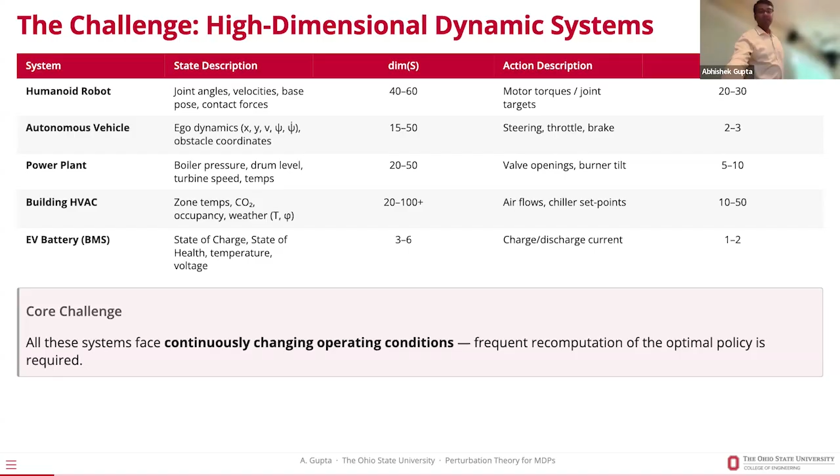So perturbations are ubiquitous, as we all know. There are short-term perturbations, that is what we are talking about. So you could have a situation where you're driving on a mountain, and the slope of the mountain or the traffic on the road is changing in very short durations, within 5 seconds, within 10 seconds, or on a minute basis. You could have a crash where things change very significantly in a matter of a few milliseconds or a few seconds.

You can have medium-term changes. So for instance, if you're driving an ICE vehicle, internal combustion engine vehicle, then your oil and your fluid would degrade over a period of 4 to 5 months, 6 months. Weather changes over a period of months. And then there is certainly long-term degradation which happens over the period of years. And while our group has worked on all these three different types of perturbations, today's talk is mostly about short-term perturbations; we are not going to be talking about medium-term and long-term perturbations in the system.

So this was the problem given to us back in 2017, I think. This was the vehicle testbed. It is sponsored by Delphi Technologies and a bunch of other companies, as well as ARPA-E. And you can see the Ohio State logo as well. So actually this vehicle is Ohio State's property. This had a lot of instrumentation to be able to get information from the roadside unit, get information from the traffic lights, and all of that stuff.

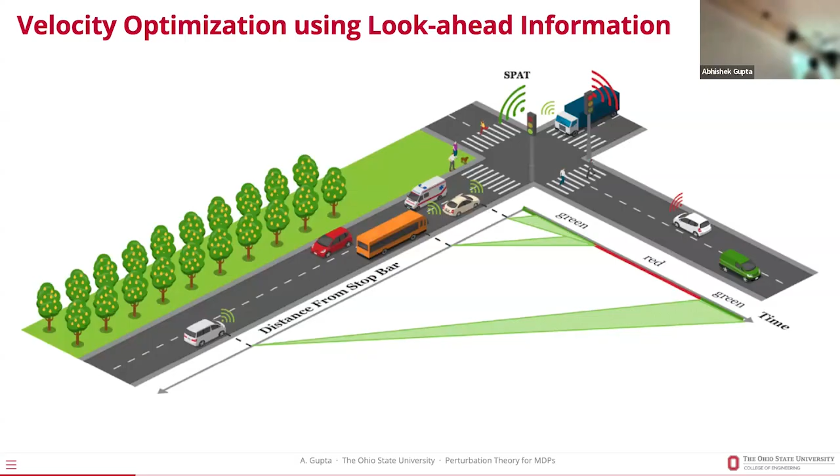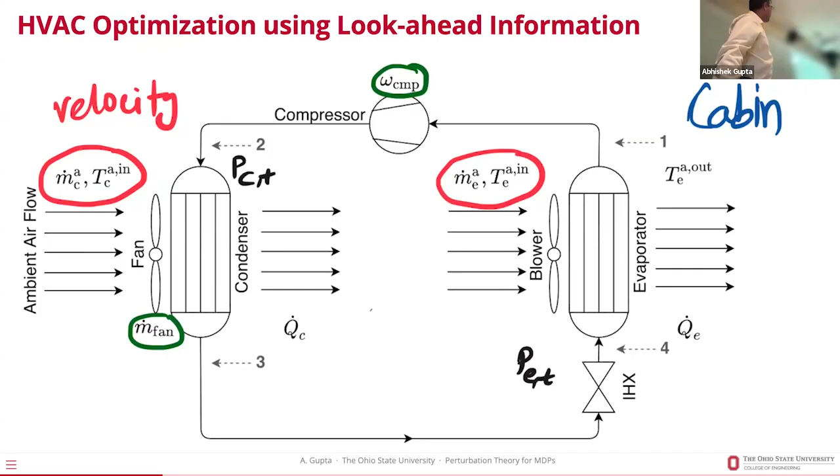Generally speaking, if you're driving between 12 noon and 4 p.m., the temperature doesn't change that much. But in the morning, the temperature changes quite rapidly between 7 a.m. and 8 or 9 a.m., so the ambient temperature changes significantly over a 1 or 2 hour duration. Or if you are climbing up or coming down a hill, the temperature and air density change. All of that information can be used to optimize the HVAC energy consumption in the vehicle.

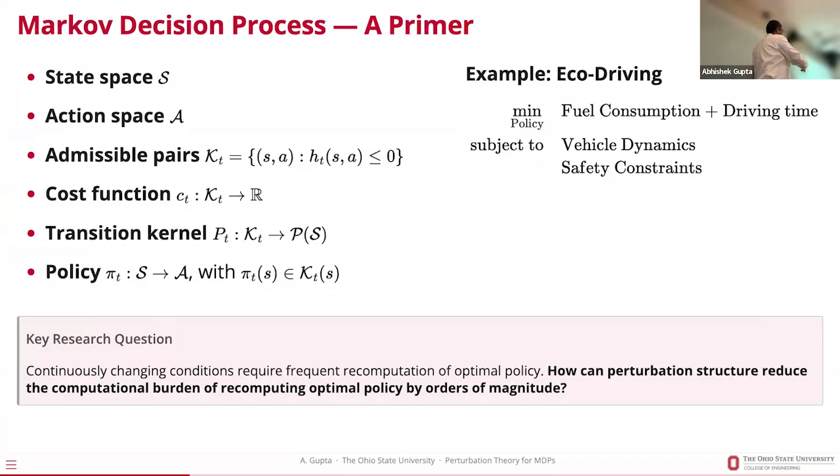So this is the general setup, and we are going to make the state transition function deterministic in the next slide. So this is my finite horizon expected cost. I have the terminal cost, I have the running cost. My action is picked according to the policy. My state transition is picked according to the state transition function.

And the way to solve this problem is to apply this dynamic programming algorithm, which is you keep track of the future cost to go, and you have the current cost, and you minimize the total expected cost over the admissible action set, and you get the current value function, and you proceed backwards from capital T to time t equals 0.

Now, what happens while we are on the road or we are carrying out some mission? So I have my original nominal MDP. This is the problem that I just solved at this particular time step. And I have my pi star t and V star t, which is the optimal policy and the optimal value function. And then after 200 milliseconds or after 5 seconds or after 15 seconds or after 1 minute, I now have a new set of constraints. I have a new cost function. I have a new transition kernel. And now I have a completely new optimal policy and optimal value function corresponding to this perturbed MDP.

So this is an idealized model of your actual problem, because if my true constraints were changing continuously over time, I would need to compute a robust policy rather than an optimal policy, because I want the constraints to be satisfied even if the parameters change within a policy. You see, when you are driving the vehicle, you never have such significant perturbations without prior knowledge in a connected vehicle environment.

So what I mean by that is, if a car is supposed to come into your lane, so we are not talking about accidents here, it will first turn on the indicator, and the connected system within that vehicle will automatically broadcast that I'm going to come into your lane.

No, but I can also have constraints like, I don't know how an engine works, but let's say my compressor cannot actuate more than a certain torque, right? That's right. So if that perhaps depends on the speed at which you are going, or the speed at which wind is blowing, which is outside your control. Yeah. And depending on your sampling time, you will know that the wind speed could change within some amount during that time. So you may have chosen a control policy according to what the state was earlier.

Yes. But if the function changes over that interval when we're executing that policy, then I may not be using feasible actions. Right. I see your question. Okay. So there is a hand-wavy point and then there is a mathematical point.

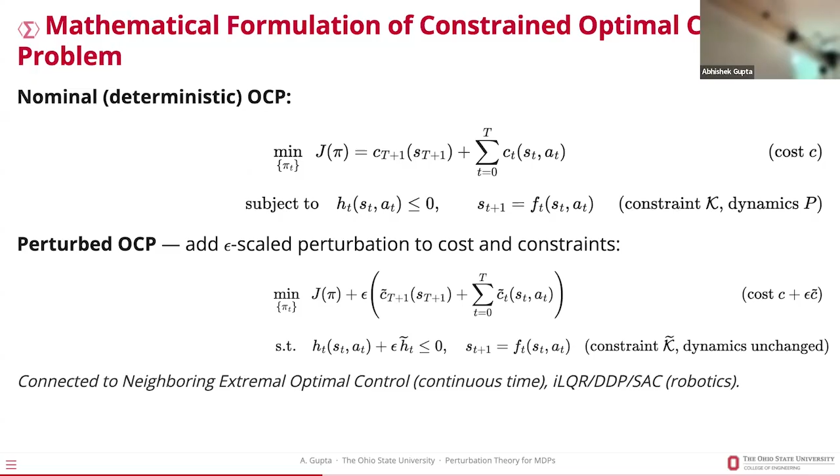Wonderful. So this was my original MDP, and like I said, I'm not looking at transition kernels that are stochastic. I'm looking at kernels that are deterministic. So I just have the typical state transition function. And now I have the perturbed optimal control problem. So I have the original cost plus epsilon times this change in the running cost. So my set point has changed.

So imagine you are in the vehicle, you're very hot, and you change your vehicle set point temperature from 22 degrees Celsius to 21 degrees Celsius. Or if you're cold, you change it from 22 to 23 degrees Celsius. So now you have perturbed the tracking error, and that appears in the tracking cost of the system. And then you have perturbations to the constraint. For the first part, I'm going to assume that the state transition function doesn't get perturbed. But in the next part, I'm going to assume that the state transition function gets perturbed as well.

So right now, let's for the sake of simplicity assume that the dynamic remains unchanged. And this class of problem, this framework is very similar to the frameworks that have been pretty classic within the controls community.

So ILQR, DDP (differential dynamic programming), and sequential action control. All of these are different frameworks used to solve problems of this type under various settings without constraints. Typically in the traditional robotics literature, they tend to ignore the state action constraint, or they have just a box constraint on the action.

But we are assuming nonlinear state transition function, nonlinear constraint, and nonlinear cost function. So we differ in our approach compared to some of these existing tools. The existing tools try to solve this problem optimally, whereas we are trying to solve the problem with perturbation and perturbed constraint, but with a complete nonlinear system.

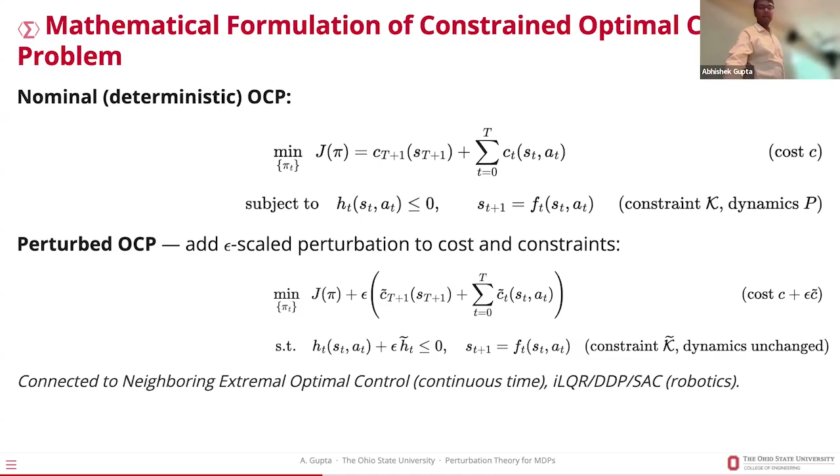But these are all differentiable. So it's nonlinear, but these are all differentiable functions, so that I can compute the first and second order derivatives.

So how do we solve this problem? As I mentioned, at every point of time, I'm going to be solving this constraint optimization problem. And the hope is that in the perturbed problem, I'll have the original nominal cost-to-go function, which I had computed at the previous time step, and then I'll have some first order perturbation and then higher order perturbation term.

So what we are going to do, in a nutshell, is this: the problem is something that we have already solved. This is the perturbation at every point of time that I need to solve for. And then I'm going to ignore these higher order terms, and I'm just going to solve this first order extension of the DP at every point of time. So that's roughly what our goal is in the rest of the talk.

So under various smoothness assumptions, this is all second order sufficiency condition for solving constraint optimization problems. So assuming that the second order sufficiency condition is satisfied at every point of time and at every state action pair, which is a very strong assumption.

But in most of these practical problems, these assumptions are satisfied, barring a set of measure zero, which are the boundary conditions where these conditions are not satisfied. But for the rest of the state space and action space, these conditions are generally satisfied, except on a set of measure zero.

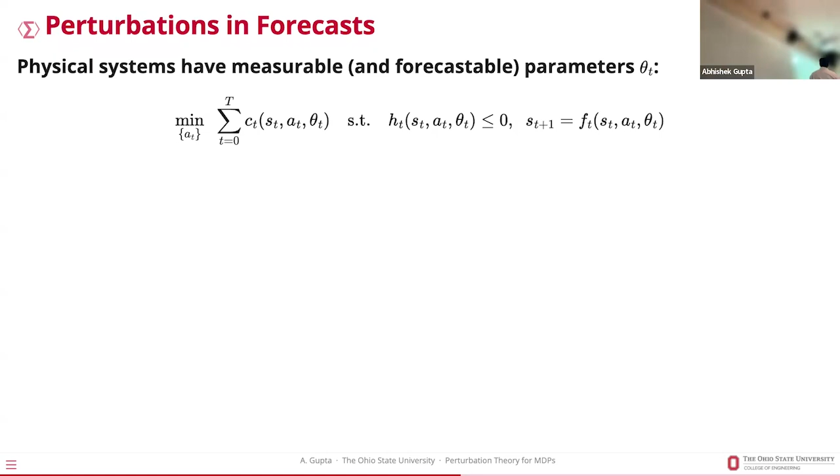Now we are in the situation where we are trying to optimize the HVAC system, and you have these parameters: the velocity of the vehicle, which is external to the HVAC system, and the ambient temperature, which is whatever the air temperature outside is, also external and not controllable. But these are things you can measure—you can measure the velocity of the vehicle and the ambient temperature of the air. So you have this HVAC energy optimization problem subject to constraints and the state transition function.

And then you have this perturbed problem. Your parameters shift by some delta theta t, which is an update to the forecast. So I'm driving my vehicle on the road, suddenly it went from green light to red light. Now I have to stop my vehicle at the red light, so my velocity, instead of being 30 miles an hour, became 0 miles an hour. That's the update in the forecast. Now my cost function has changed, my constraints have changed.

So you're assuming you know the trajectory of theta for the next capital T—next 5 seconds, next 4 seconds, something like that. Yeah.

Or you may be on a hilly area, hilly terrain, so you might be either going up or going down. I don't know if any of you have driven in the mountains, but one thing I've done in the mountains, just for fun, because I'm an optimizer, so I have to do it: when I'm going uphill, I turn off my AC, but when I'm going downhill, my AC is on full blast—very low temperature and very high fan speed. The AC actually slows the car down when you're going downhill. This actually happens, you can test it out yourself. That way you can optimize the energy consumption of your vehicle. I did that at Yellowstone National Park, so I remember that day very well. I was very excited and happy that I was able to optimize the energy consumption of the vehicle, and I didn't have to use my brake. My air conditioning system was actually stopping the vehicle, making sure I was under the speed limit when going downhill.

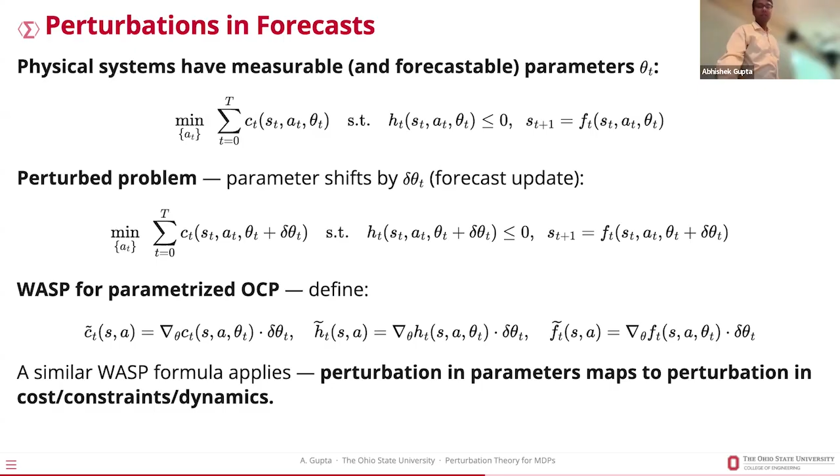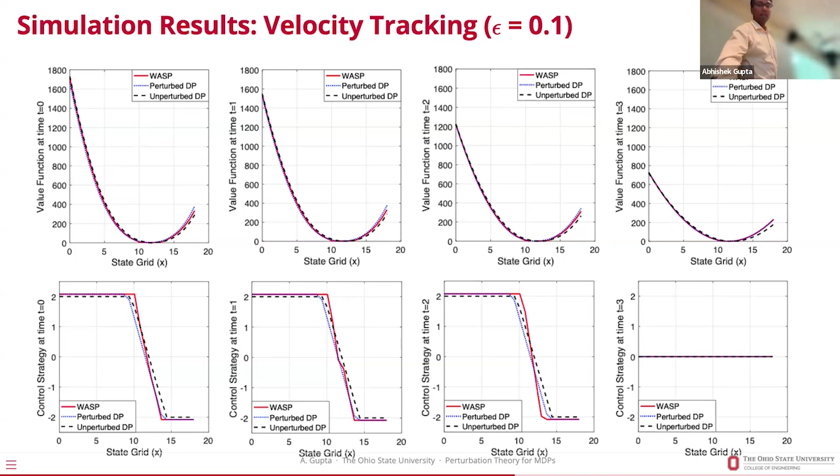So you apply the WASP algorithm and look for infeasibility. Wherever there is infeasibility, you redo the computation with the full constraints. Otherwise, you just let the solution be, as long as it's meeting the constraint. But you can see that the WASP solution actually sits between the unperturbed problem and the perturbed problem, so we are in very good agreement with respect to the theory.

This is a situation where epsilon is equal to 1, so you have a huge perturbation in the cost function as well as in the constraint, but we are able to solve the problem. Again, in this particular region, the set of active constraints is this state—in this particular region of the state space, the set of active constraints has changed quite significantly, so you have to solve the entire QP. But in this region and in this region, you don't have to solve the entire QP; you can just apply our WASP algorithm and get the near optimal solution.

So when you say in the top graph, 'perturbed DP,' that's the optimal value function of the perturbed DP.

This is the optimal value function of the perturbed DP, and the unperturbed DP is the optimal value function of the unperturbed DP. Wouldn't it be more interesting to also compare what happens if I use the optimal policy of the unperturbed DP in the perturbed dynamics?

That is the current state of the art. Yes, but what its performance is, I haven't checked. Because WASP is an improvement over doing that, the dumb thing. We did not do that.

I guess that's a good point. It probably would lie somewhere in between this red curve and this. Hopefully. You haven't really shown that you are better than that. In principle, you should be, because you're taking a step in the direction, so that's the objective.

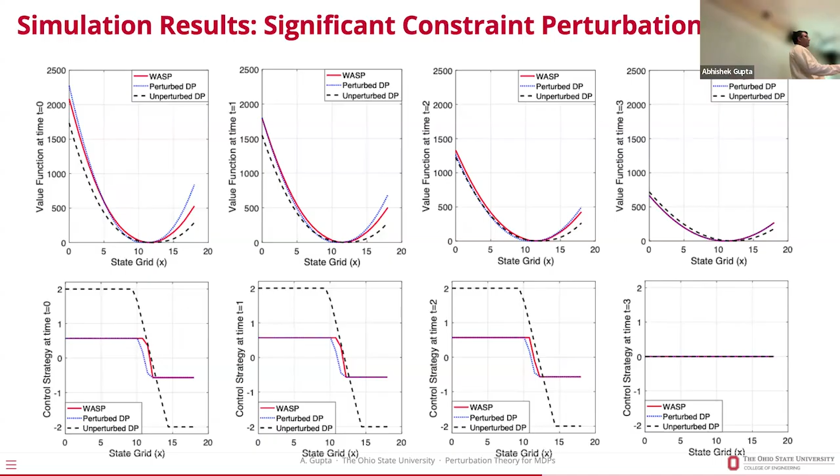So is there a theorem there? It's not there, but we observed it in practice. So if one WASP update, if this dt, going back to this expression, if delta theta t is very high, you can apply additional WASP, so you get the second term as well. So additional WASP at this particular new policy and new value function gives you a much better approximation.

This was the question asked at GE because they have significant perturbations in their operating conditions. They asked if one application is not good enough, what happens if you do another application, and then you get much closer to the optimal solution.

About the computation time: for the perturbed DP, if you start from the nominal solution, pi star and V star, it takes about 2.87 seconds to solve that problem. This is on MATLAB on a computer, so the code is not optimized to solve DPs, but this uses fmincon within MATLAB to solve the constrained optimization problem. So this is the baseline solution.

If you use only WASP without further computation, you get an 80% speedup in computation time. If you use this output to warm start the perturbed DP, you can solve the problem much faster, getting an overall 15% reduction in computation time relative to the baseline, where you warm start from the nominal solution.

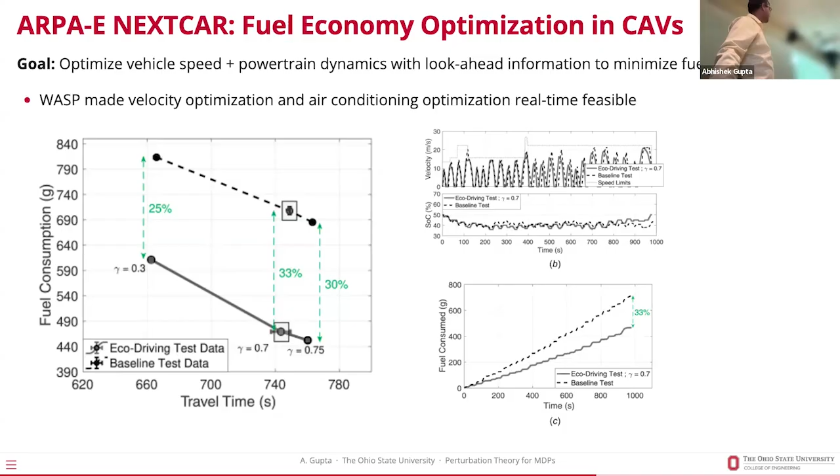We did the actual run on a test track around OSU. But I don't have those videos and stuff. It's something that mechanical engineering faculty colleagues show in their presentation.

For the thermal management in electric vehicles, we were able to apply this WASP algorithm, and we demonstrated that we are able to solve the problem in a matter of 25 seconds, whereas perturbed DP would have taken 120 to 130 seconds to solve. So we were again meeting the requirements, 80% reduction in the computation time without much loss in optimality.

So this is the unperturbed DP cost associated with set point. This is the WASP cost associated with the set point. So you can see that this cost, the perturbed DP cost and the WASP cost are very similar, but very different from the unperturbed cost in some of the cases.

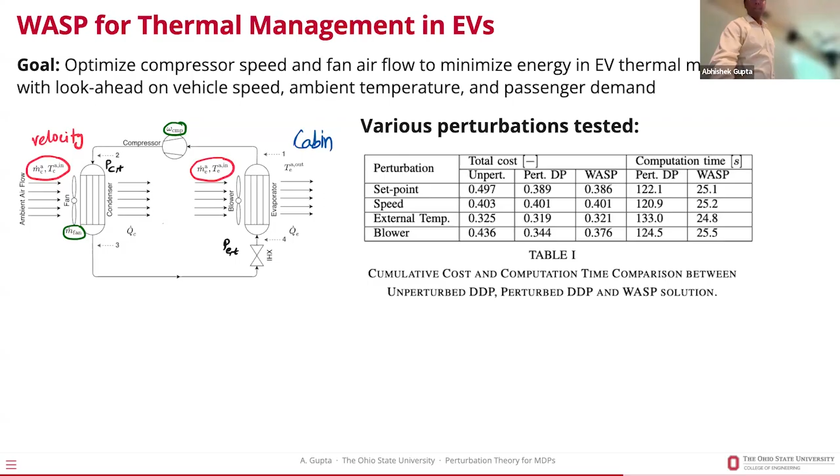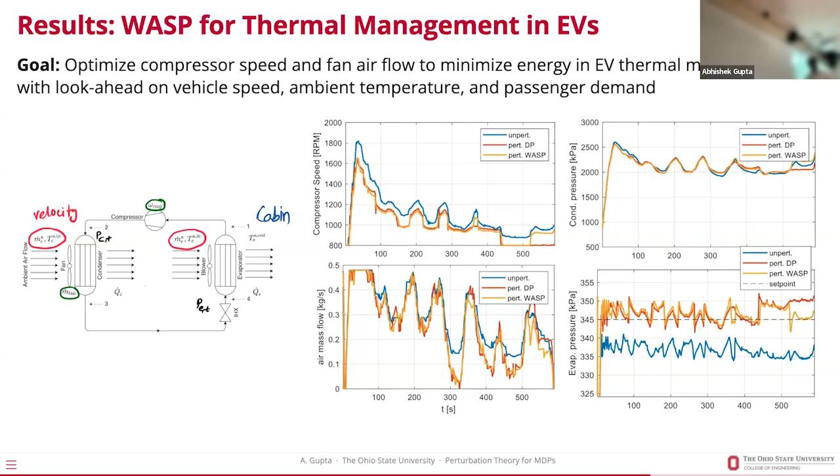So this is, of course, the state trajectory, not the action, but actually compressor speed is the action. Condenser pressure is the state, air mass flow is the action. Evaporator pressure is the state. These two are states, these two are actions. So you can see that WASP is in good agreement with the perturbed DP solution most of the time.

So we are trying to extend this whole theory of perturbed DP to generate new kinds of reinforcement learning algorithm. That's the joint work with Aditya, and we've been working on it for over 2 years now. We needed to use a lot of functional analysis in order to come up with the algorithm, but now we have a very solid reinforcement learning algorithm where the state action spaces are Polish spaces, the policy space is viewed as linear operators over function spaces.

And we're able to come up with a new class of algorithms which are distinct from the PPO and TRPO algorithms for solving reinforcement learning problems. Through simulations, we have shown that this is faster than PPO for finite MDPs, but for general MDPs, we are still continuing to run the simulations.

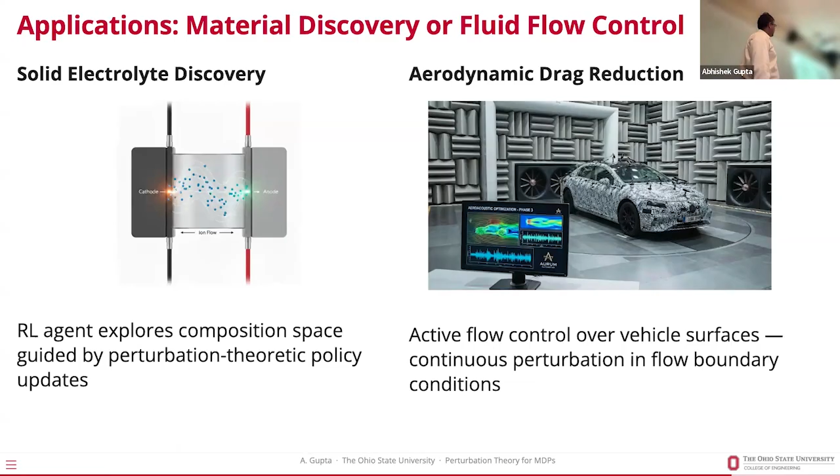The applications of some of these newer algorithms are in discovering solid electrolytes or discovering materials or doing flow control over rigid bodies. So these are the kind of problems that we are currently thinking about and looking into, where some of this perturbation theory that we talked about today could be very useful in real world implementation.

So to summarize, we have an algorithm, WASP algorithm, which is around 80%, or 79% faster than solving the perturbed DP from scratch, which has also led to new RL algorithms that I did not talk about today, but I'm happy to chat about it offline.